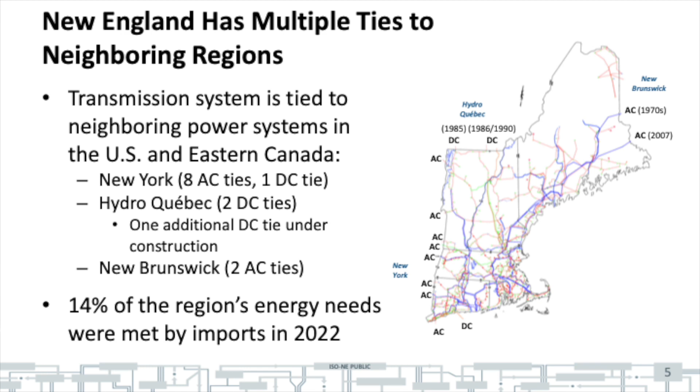This is what it looks like. We have DC ties with Canada, AC ties also with Canada and with New York. Generally, we have been farther away from coal. We've relied on oil as our fossil fuel of choice up until recently, and then we went along with everybody else and got really happy about natural gas.

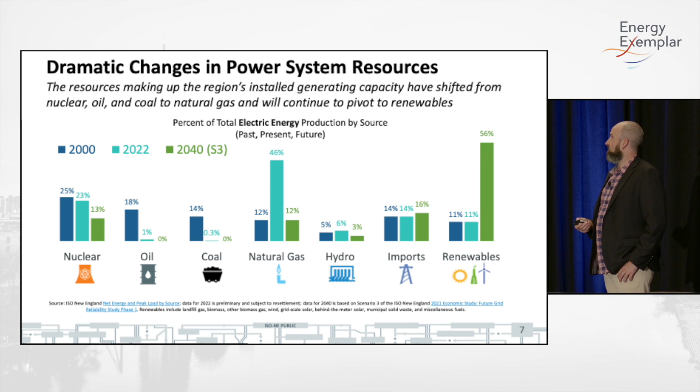Then looking out to our 2040 studies coming out of our future grid study from last year, we go back down to our 2000s-ish amount of natural gas, and that's almost all replaced with renewables. The thing that's missing in this percentage graph for understanding is that the denominator of load changes dramatically—we're about doubling what we're expecting in terms of overall system load.

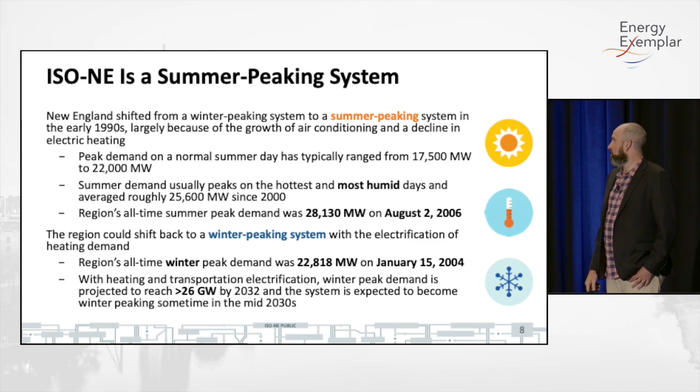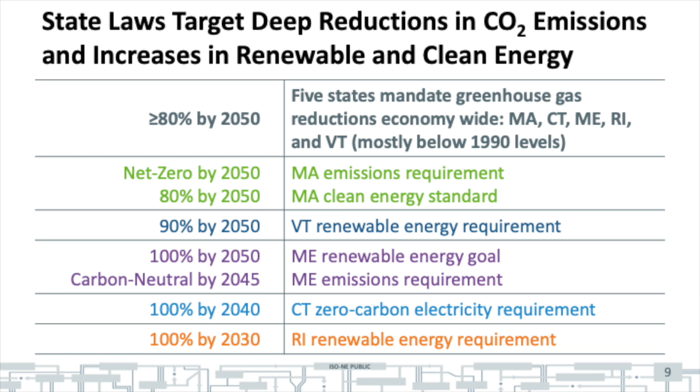Currently, we're a summer peaking system. We expect that to change in the mid 2030s to a winter peaking system, and that's almost entirely driven by heating electrification. Every state but New Hampshire is very excited to set goals for a transition. However, New Hampshire already has one of our nuclear power plants, so they're on board anyway.

Our queue is full of a lot of things, mostly wind and storage and solar projects, and almost nobody's going to build a fossil fuel generator anymore.

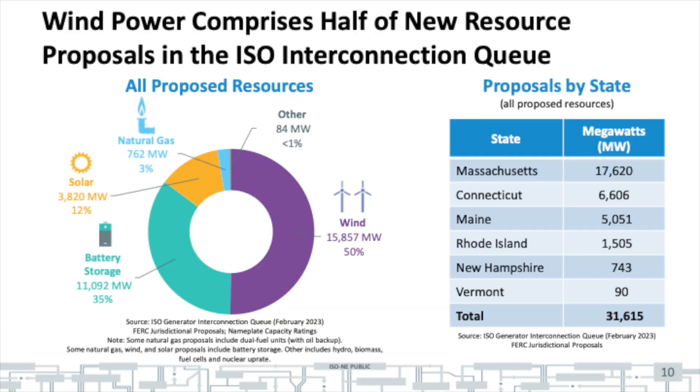So that leads to—as part of saying we threw away all the assumptions about how we do these studies—we actually changed our tariff about how we do these studies as well. We looked around the country and borrowed from some of our sister ISOs, particularly in New York. We're now doing something repeated. Up until this point, it's been stakeholder driven what we do in these studies, and now, while stakeholders can still submit requests under the new format, we're doing repeated reference scenarios—3 of them—that I'll talk about in a second, that look to essentially bring more structure and also make these more repeatable and comparable as we go through our study work.

And as part of changing how we do this work, we also changed tools, and that's when we brought in PLEXOS 2 years ago. With our previous tools, we felt a bit constrained, because the reach for these new systems is so far from how we operate the power system today, and it showed in the tools. The tools were optimized for a thermal grid, and it felt as if wind, solar, and battery were like cool little add-on bells and whistles to the main thermal engine tool. As we go to a renewable dominant system, the fact that those are add-on tools became a problem. With the core design of PLEXOS, of objects and constraints, it allows us a lot of flexibility as we look at these new systems.

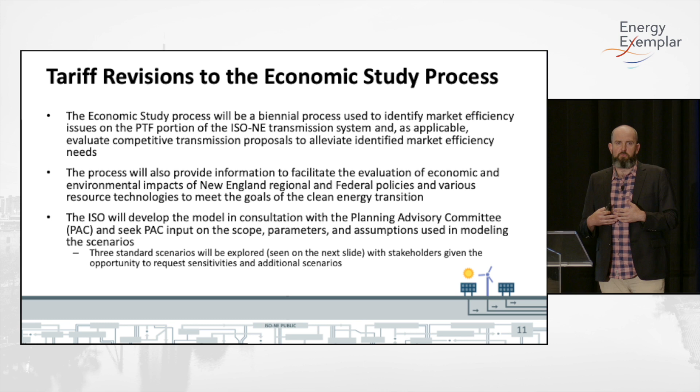So this year's study is called the Economic Planning for Clean Energy Transition Pilot Study. We have extra flexibility this year to test out our new tariff language, and that flexibility has allowed us to look into different things than we have in our past studies. To some extent, our past studies have become a little repetitive—it was like, how much wind do you have here, how much wind do you have here, how much solar do you have there. And you get into these minutiae of little assumption changes that take a lot of time to run.

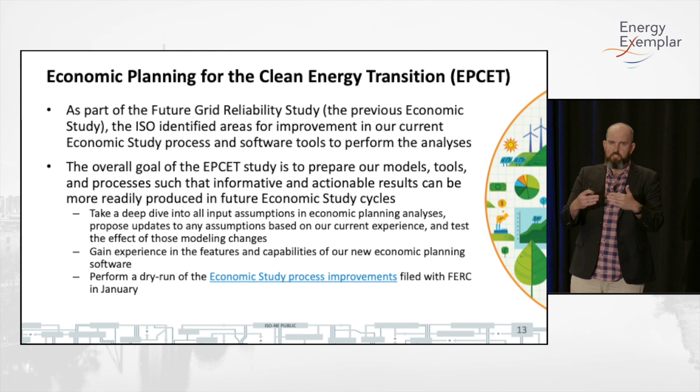Ultimately, we had done those studies for five-plus years, really a decade. And we wanted to move away from that same little constant adjustment approach that doesn't get you to actionable results. So with the new study, we've had more flexibility to do a deep dive into our overall assumptions.

So in this study, we have a benchmark scenario, which compares last year's real-time historical data to the simulated model data. We're essentially testing the fidelity of the model, making sure it works correctly before we go out into the future where we don't know the answers.

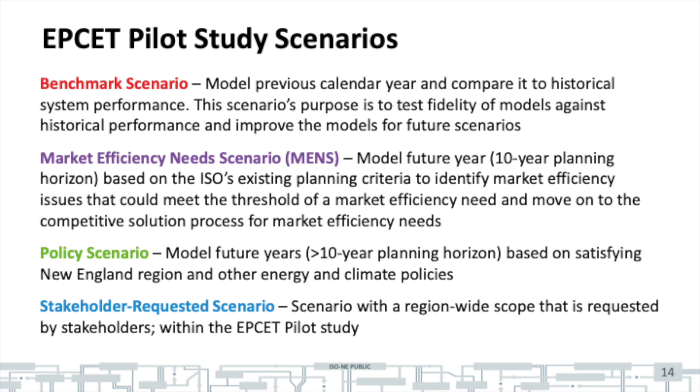And then we have a 10-year out case, which is the end of our actual forecasted data. After that, we get into other creative ways of guessing future load and demand. The ISO's system planning used to always end at 10 years because that was plenty of time to build a thermal generator or transmission line. But for this scale of transition, 10 years is not really going to do it.

So we've moved beyond that to also look at what we call our policy scenario, roughly 2050 — the year doesn't matter as much. It's the end point of all the state policies, looking at what that system looks like. And then we have a slot where stakeholders can request things as well.

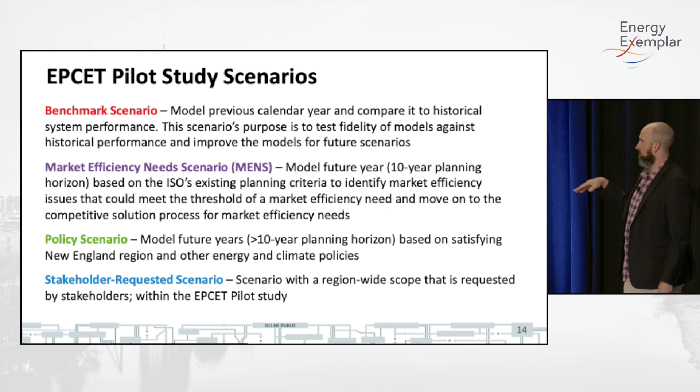And the policy scenario is where we're using the capacity expansion tool within PLEXOS. That's also the area of most interest for me, and that's what I'm going to focus on today.

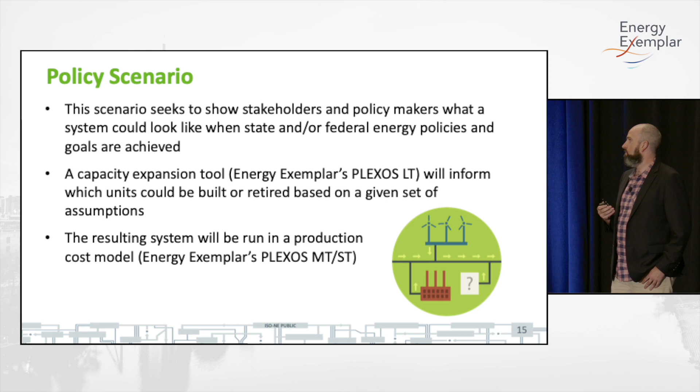In terms of how we're doing the study, we view the LT tool not as something that can operate all by itself, but as something that works in conjunction with the ST and MT tools. We wanted to do more of a trust-but-verify approach with the LT tool, so we step back and forth in time as we work through it — going maybe five years, then moving to ST.

Just thinking about it this way: if you start with music on vinyl records, the original recording is full quality, and then when you move to CDs, you went to a sampling method. To the human ear, there's no difference between the record and the CD. Then if you go to an MP3, the initial ones weren't very high quality, so you could definitely hear the difference. But it's all different sampling methods, and now with Spotify, if you flip the right buttons, the audio quality is pretty good.

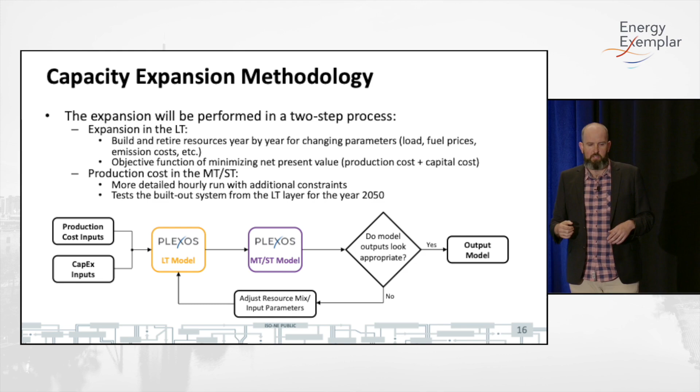And going back to this morning's talk about the LT model from the founder here at Energy Exemplar, there are all different sampling methods, but we're not sure at this point — we have to try out a few more that he mentioned this morning. We're not entirely sure yet if those sampling methods are catching all the things we want to catch, so we step back and forth between the two.

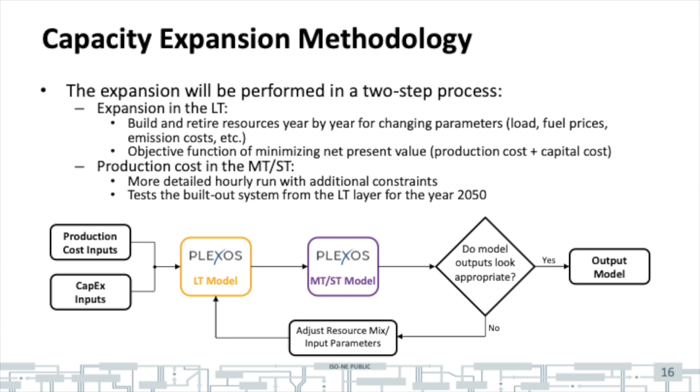And again, just to give you a sense — I find with our studies sometimes the outputs are interesting, but also sometimes just the inputs are interesting, because we have this charge as a reliability RTO, ISO.

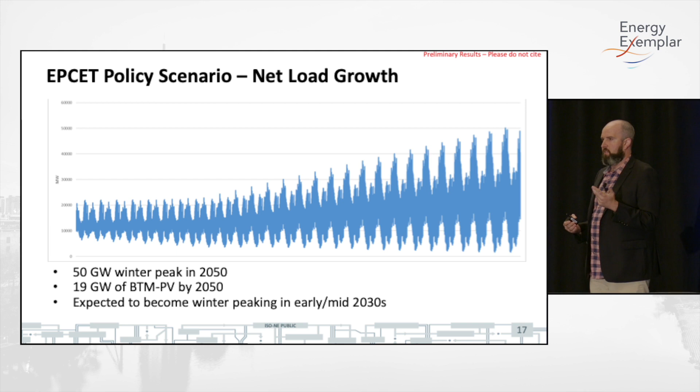We have specific responsibilities around planning the grid, operating the markets, operating the system. But realistically, at this point, with how policy is, we're the only central organization involved in climate change in New England. Our charge is not climate change, but since all the things to prevent climate change are going through the electrical grid, we're effectively that central organization as well.

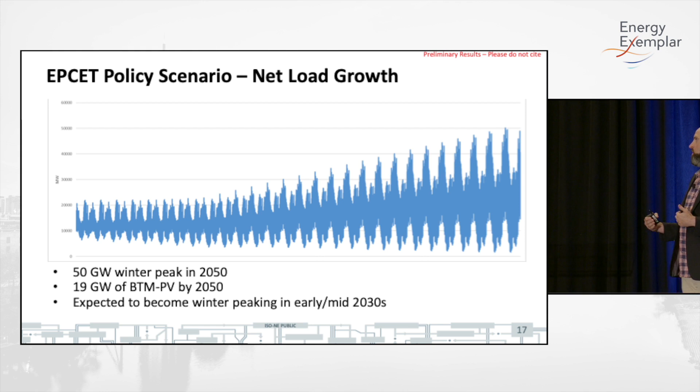And so one of the things we can do is take all these state goals and policies and just say what it all means. And one of the things for us is just the net load.

So remember I was saying that right now we're at 13,000 megawatts today, and our peak is 28,000. By 2050, our peak becomes about 50,000. However, this is on a yearly time basis on the x-axis, stepping through the years — but you can see that we also almost touch zero in the same year. So we need to build a grid that can both reach 50,000 megawatts and also operate at about 600.

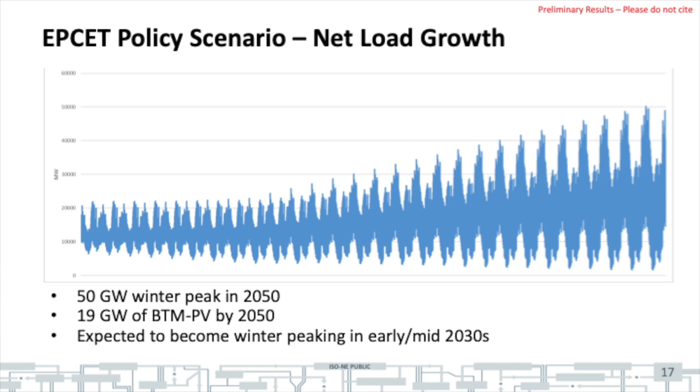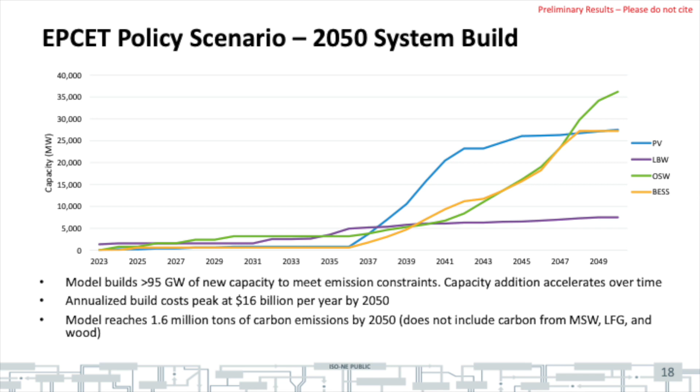So we use the capacity expansion tool, and this is one of the build outs that we got. Our system favors offshore wind primarily, then batteries, and then PV, and least land-based wind. But I want to caveat that land-based wind is actually, from our analysis so far, essentially best value or best impact for our area. But the simple truth is we don't have enough space for it. There's a lot more ocean available near New England than land to put land-based wind on.

And this is a very iterative process that we did with PLEXOS. Initially, when it ran, we would have different cutoff points of where things had to be built by, and left to its own devices, it'll wait until the year before and build like 15 gigawatts of wind in one year. So we have build caps per year, and we call it the glide path, in order to have this happen in a way that could be feasible.

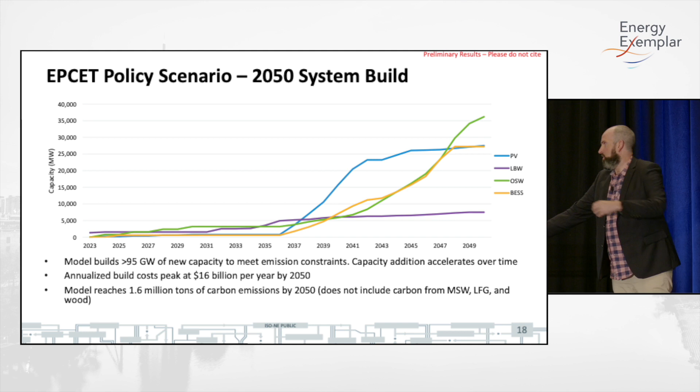We're looking at, I want to emphasize the y-axis here in terms of the capacity, that it's 36 gigawatts of offshore wind. Again, current peak load is 28 gigawatts, today's is 13 gigawatts. And we'll have 26 gigawatts of batteries and 26 gigawatts of PV and 7 gigawatts of land-based wind. So we're talking about a dramatic increase in our total nameplate capacity values of our overall system. And the annualized build cost is about $16 billion per year by 2050.

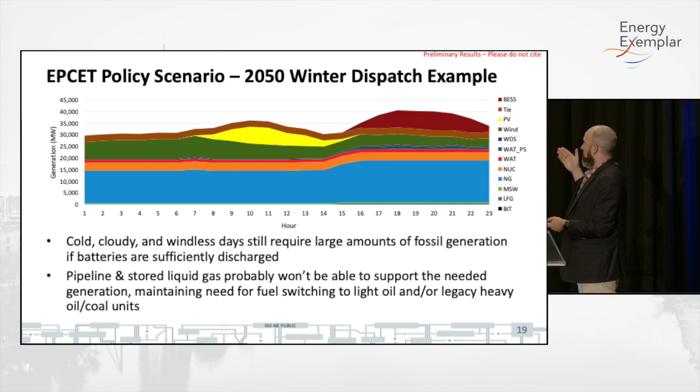And this is looking at a winter dispatch in 2050 for us. We did not retire any units that were not already retired, we just left them on. We figured the models wouldn't pick them. But in the 2050 year, we actually still need a lot of fossil fuels. This blue is natural gas, that black is actually coal. And I think we maybe have turned off our oil plants in this case, but essentially batteries are not enough.

And this is another study we've done, that we simply don't have time to charge them anymore with the heat. Basically the concept of storage for the shorter term, where you can charge it overnight like we do with pump storage and use it during the day, like a half and half, becomes like a 70-30 in the future with heating electrification. It's just like not time to charge anymore.

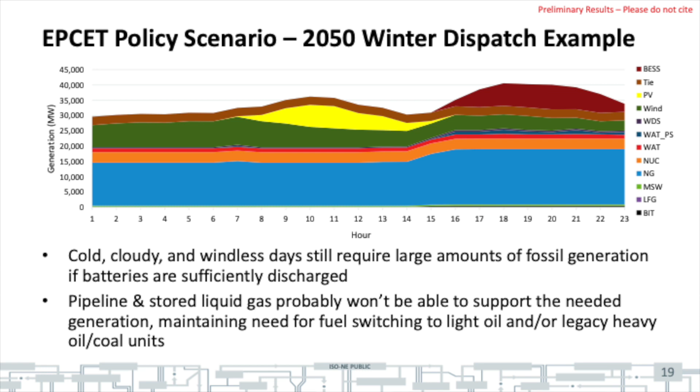And these are, our interfaces are congested. I'm going to skip by this because I don't think it's really that surprising. The current transmission system can't carry twice the power.

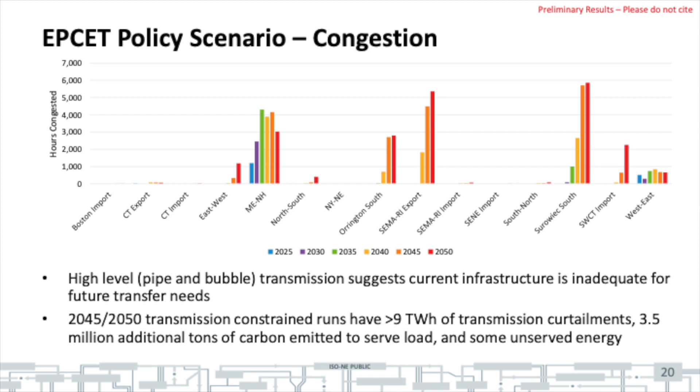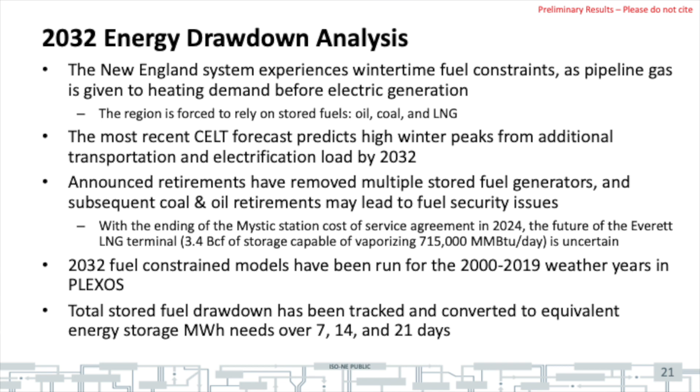So now we get to the slides I think are the most fun. So for this analysis, we're looking at 2032. We step back, to some extent we've studied into the future and we have 2050 results, and they are very interesting, and I'll talk about them a bit more. But we have to solve the near future, and I feel like that's where our focus is probably coming to, look at 7 to 12 years out in order to make the way to the transition and keep things reliable and ideally affordable.

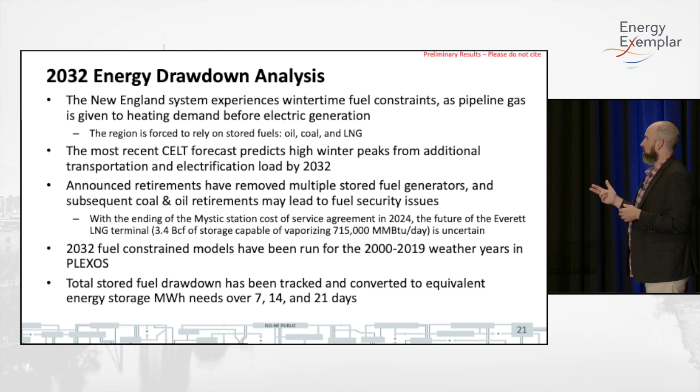So for this, we just wanted to give the parameters of what the challenge is. We are looking at what amount of storage, likely battery storage, would you need in order to compensate for all of our existing oil, coal, and natural gas plants. In the interest of time, I'm not going to do a lot of the detailed explanation of how we did this, but it's in the slide decks and I'm happy to talk afterwards. But mostly it's just converting energy types to a different energy type primarily, so we're looking at what we use in BCF per day or whatever the fossil fuel unit is and moving that to battery.

So a couple notes to start with. We had, in our future grid reliability study, one of our alternatives had 2.3 terawatt hours of battery storage, and that was not enough to get through the winter. At the moment, we have pump storage reservoirs that are good for 0.010 terawatt hours. And just a note that it's possible these could be refilled along the way, but let's go into it more.

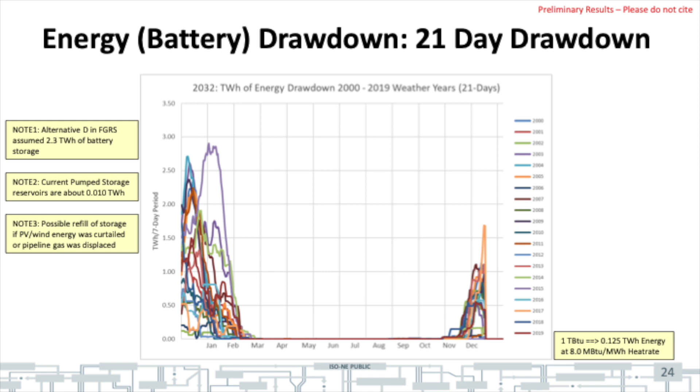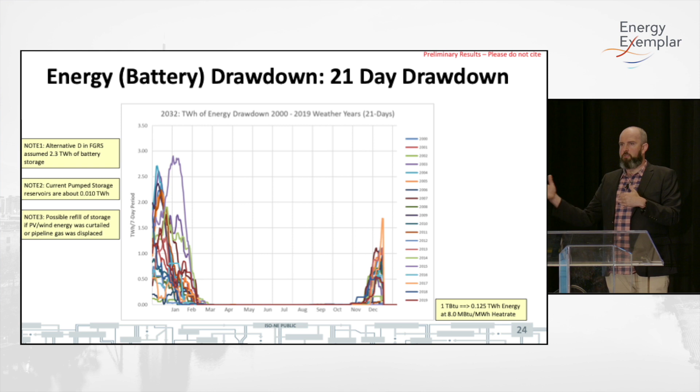So whatever the storage means, almost everything is energy storage, like DR is energy storage. So anything having Quebec hold back the reservoirs and trading power, that means energy storage. There's lots of options out there, but we do need a tremendous amount of it, and this is just for New England. But this gives us the parameters to look at, that if we're going to replace all this generation with other resources, that's how much storage we need to get through a winter period, about 3 terawatt hours.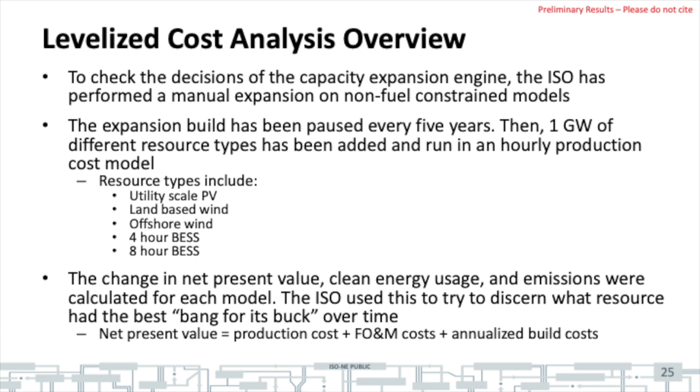We get into this middle period where all the technologies have a pretty good bang for buck. Then there's a place here, and there's another chart a few slides from now that brings this together. What happens is you run out of hours where there's still carbon generation on the grid, and trying to hit that target with intermittent generation becomes extremely difficult.

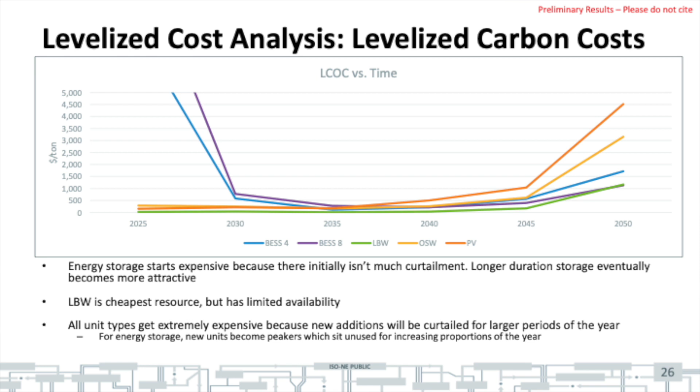So batteries, at that point, become one of our better technologies. Land-based wind is still great, but we wouldn't have anywhere to put it. Overall, with these intermittent generators it's very difficult to target the hours you want to get the carbon reductions. You get up to, for PV, $4,500 per ton of carbon reduced.

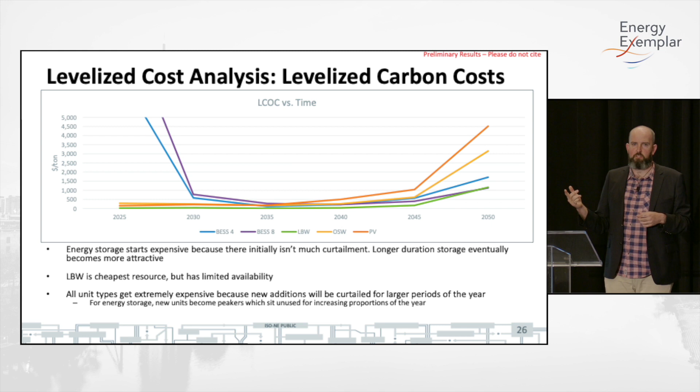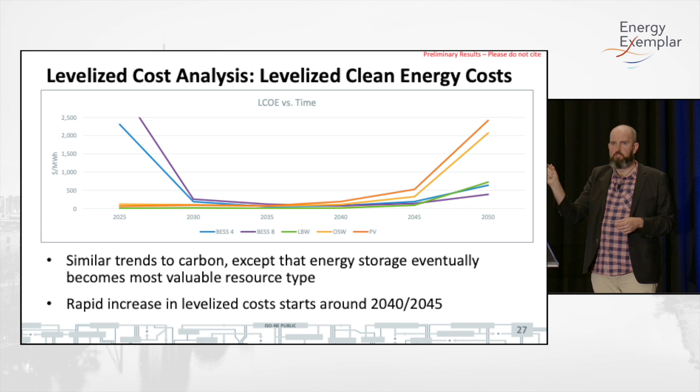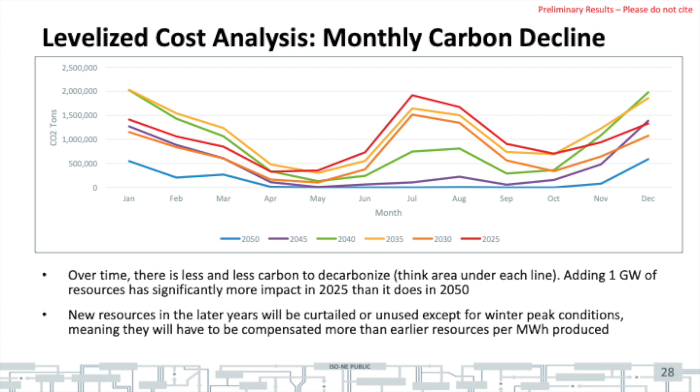These next 2 charts tell the story of what happens to our carbon profile and why those last 2 charts exist. Initially in 2025, we have a lot of carbon generation in the summer, and a bit in the winter too, but basically natural gas is coming on in the summer to help serve the load. Then gradually, as we put in lots of renewables, we essentially have no carbon generation for 6 months of the year.

But it's the winter that we're now trying to target with the remaining things to get to 90%, 100% renewable. This tells the story of duration curves and hours. Essentially, we're down to less than 10% of the year where anything we're adding is useful, so it has to be able to hit that target in order to get to that last 10% or so.

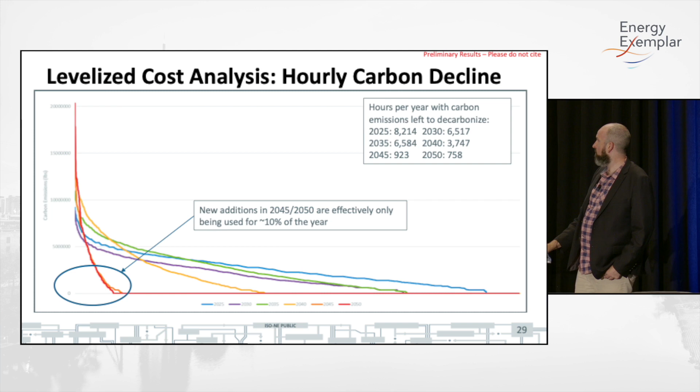So the premise is, if you're going to do this transition entirely with wind, solar, and battery, the last 10-15% of getting to renewables just gets very expensive because of this premise.

We're going to add in resource adequacy analysis and high-level transmission, but we're just looking at, if all of our neighbors are decarbonizing on the same time frame, and particularly if we're trying to build all these things at the same time, then you get into things normally outside our usual scope, like competition for resources, which further drives up costs. So we're starting to look at what else we can do, given how the math looks at those edges, and what possible solutions there are instead.

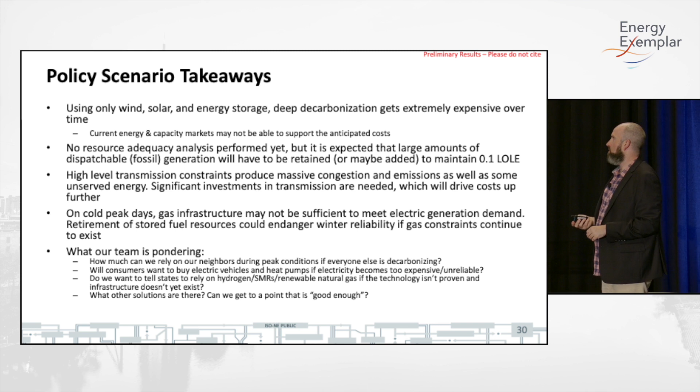That's essentially where we are in the study right now. We've established all of this, and now we're going to switch to using PLEXOS to try to imagine other possible solutions.